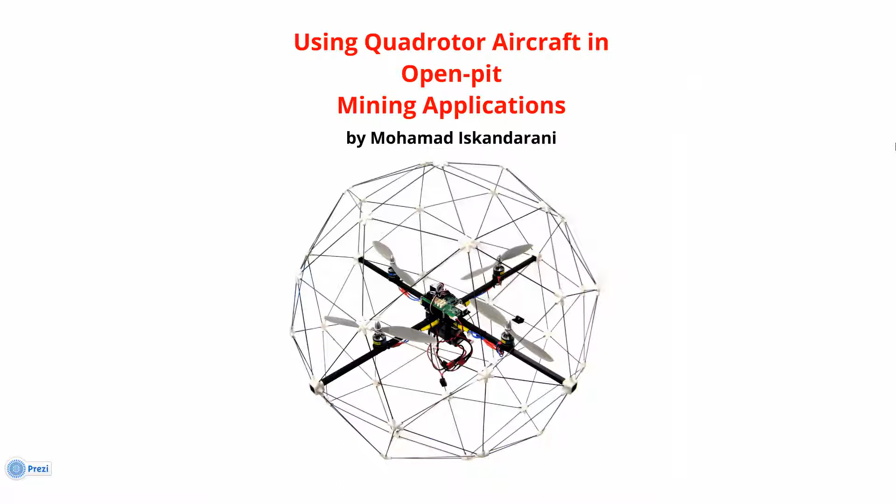We'll look first at the outline for today's presentation. We'll discuss UAV background, using unmanned aerial vehicles, and the motivation for how this fits within the mining sector. We'll look at a problem formulation discussing the different tests and solutions included in the experiment. I find it important to include the experimental setup so viewers can appreciate how the results were found. At the end, we'll discuss the details of the results and conclude with final remarks. I'll also give you a heads up about some extra videos I've made for this project.

So let's start discussing unmanned aerial vehicles themselves. What are UAVs? The definition we use is an aircraft without a human pilot on board. It's either controlled autonomously or by a human pilot on the ground.

Now, the key word I want to highlight here is autonomous. Throughout the experiments in this project and the presentation, the UAV will be accomplishing the task by itself. The user will only give a go signal for safety, and everything else will be accomplished in a decision-making process by the UAV. For those of you with a piloting career, understand that the use of complex control systems and autonomous flight with UAVs is actually replacing that career.

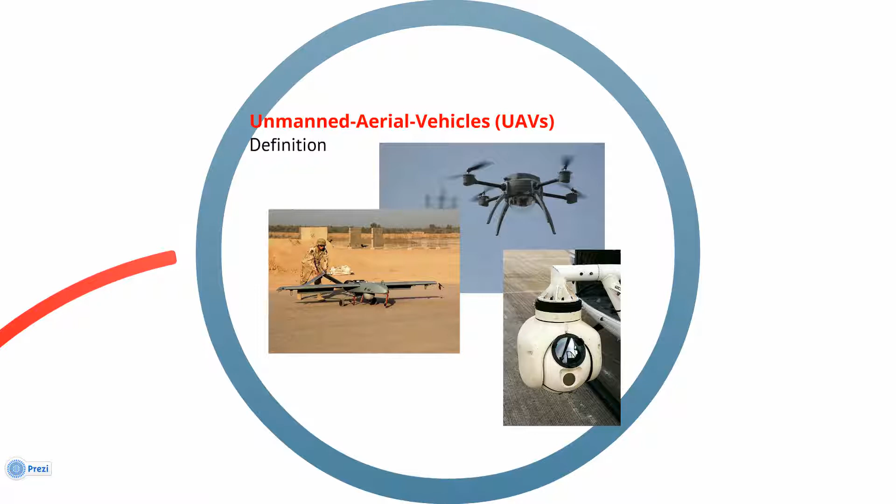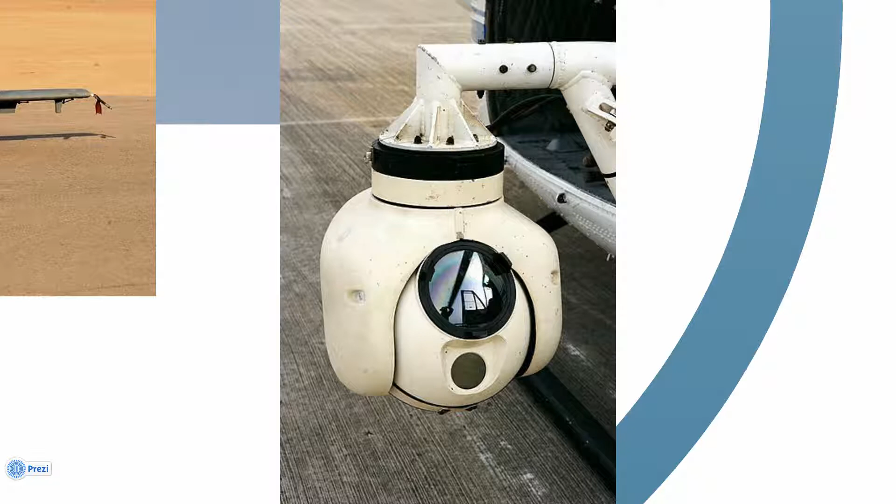There's also a number of sensors included on the vehicle. We see here a camera, but there could be other mapping equipment also available on board. I included this picture to show the complexity of these systems and how they all fit together.

This is mainly used for mapping rooms. For example, in military applications, you can send one of these inside a building to map it or even engage the enemy. And it's always easier to explain how you lost a UAV than to explain how you lost a human being. So this is another advantage of using these things.

Now, for the purpose of this presentation and this experiment, what we'll be using is an actual rotorcraft called the Q-Ball X4, the details of which we'll discuss further on in this presentation.

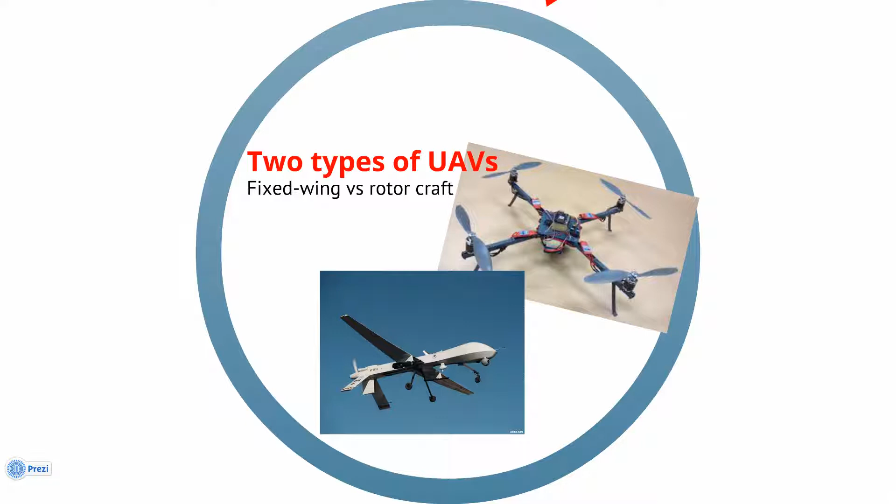Before this, we'll just look at some general applications - why UAVs, and how they're used in daily life. If we look first at search and rescue, we can send one of these UAVs to either follow actual GPS coordinates that are pre-programmed, or even use its infrared camera to locate lost individuals. We can also look at crime scene investigation. In this case, there's no tampering of the actual crime scene, so no investigators need to be there.

This is mainly used for big crime scenes, because they'll just hover, take important pictures, and then there is no tampering of the actual crime scene.

Now, if we look at the next application, which is surveillance, we have military or civilian applications. In military, it's quite obvious: you send it around the enemy line, then you can observe what's happening. While for civilian, it could be used for traffic, so observing the 401 as an example.

We also have hazardous area exploration. Here, we want to prevent humans from being harmed, so examples of this could be fallout areas or even floods. So we send the UAV in order to inspect and maybe even bring this information back to the engineers in order to organize maybe a cleanup strategy of some sort.

So these again are the applications that we used. Now, we want to be able to take the flexibility, autonomous operation, and efficiency of these vehicles I've highlighted in the picture here. We want to be able to take all these capabilities and bring them to a different field than the ones highlighted with CSI, surveillance, and hazardous area exploration.

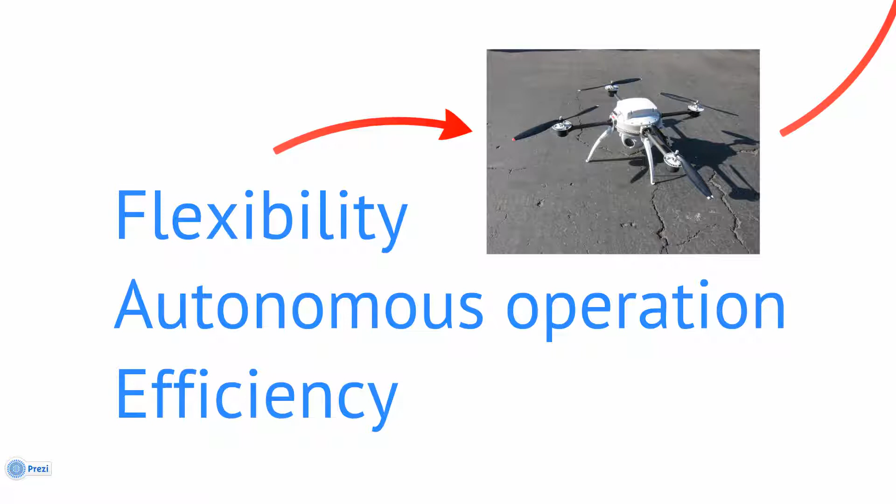In other words, we want to bring this to the autonomous mine. Since UAVs are mainly used in a decentralized autonomous way, the UAV is taking its own decisions based on certain parameters. I want to bring that to autonomous robotics used in an open pit mine.

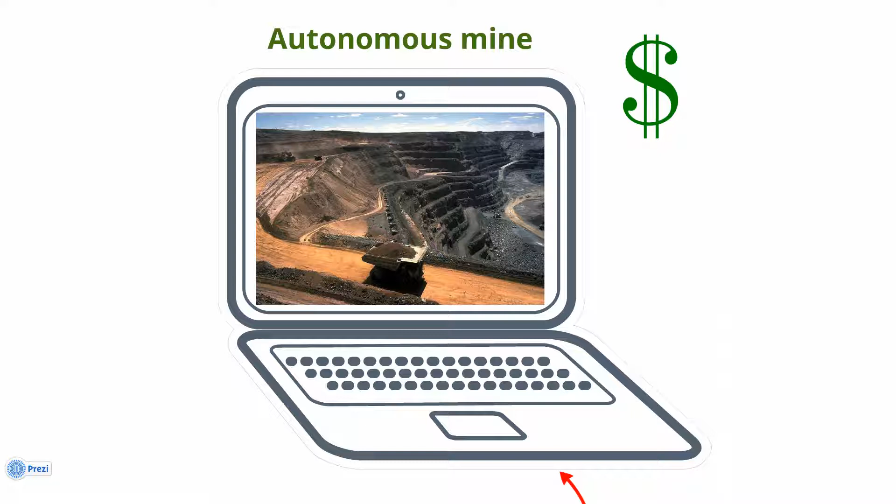And as the objective of every corporation in this field, we want increased efficiency. We want to make more money, in other words. And the UAV is going to be able to bring that capability to this field.

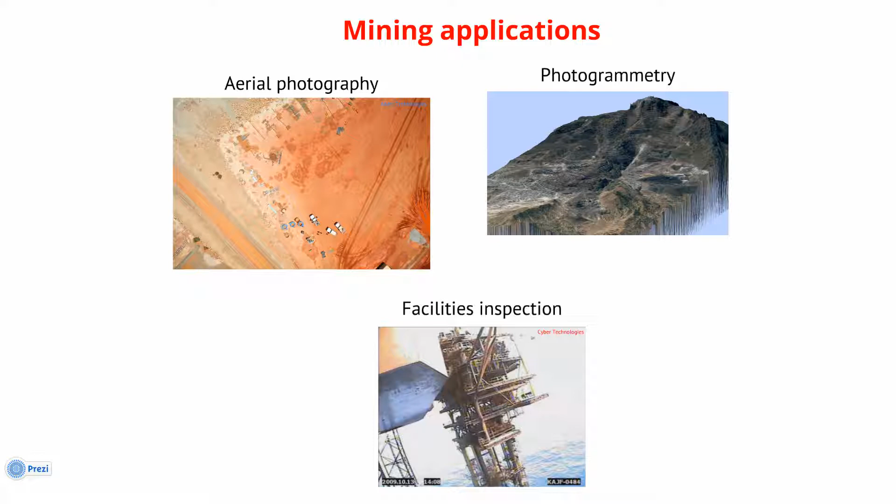So some mining applications that can be brought by the UAV to the field are, first of all, aerial photography. This picture is taken by Adam Technologies - they took a test picture of their work area. You can see in this picture the 3 trucks, some other equipment that's there. It's actually quite high resolution for something flying at a pretty high altitude.

If you look at photogrammetry, it is the practice of determining geometric properties from photographs. So we take a number of photographs of the area and we're able to recreate a 3D map or a visualization as seen in this picture here.

Now, this is very important if your corporation in the mining sector is looking for heightened command and control, because you send the UAVs, they take pictures at specific coordinates and specific frequency, and we're able to recreate this map. This way, you can have a 3D model and a 3D representation of where all the vehicles, the drills, the LHDs are operating in the area.

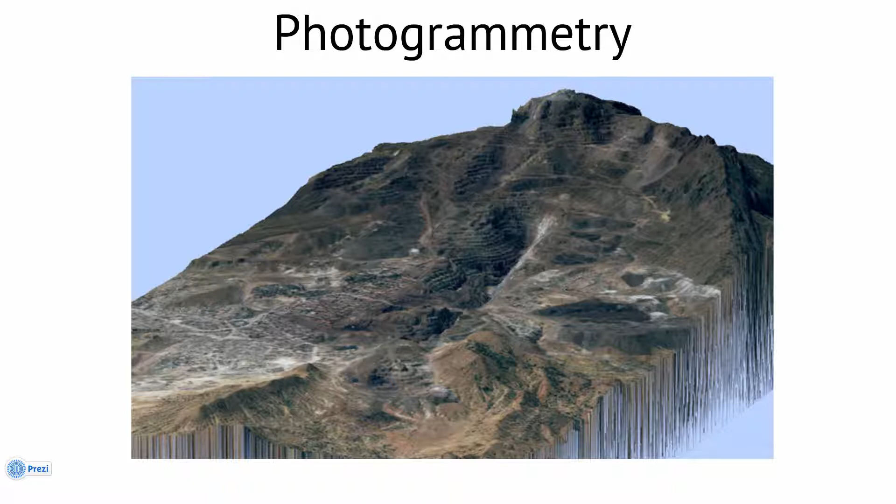And then you're able to have that ready for the engineers in order for them to have a big picture of the mine's operation.

If we look at the third application, which is facilities inspection, this is a picture taken by Cyber Technologies. It's a company that sent UAVs in order to inspect a Montara oil platform that's been damaged by fire. What the UAVs did was take live video feed of the area, and this prevented the engineers from going on board the damaged oil platform and getting injured.

So all this live video feed was relayed immediately to the engineers, and they made their plan for cleaning or evacuation, etc. This is an important application that's quite novel in the mining sector, because you send the UAVs and you avoid injury of actual humans when it comes to either inspecting actual facilities or just for maintenance purposes.

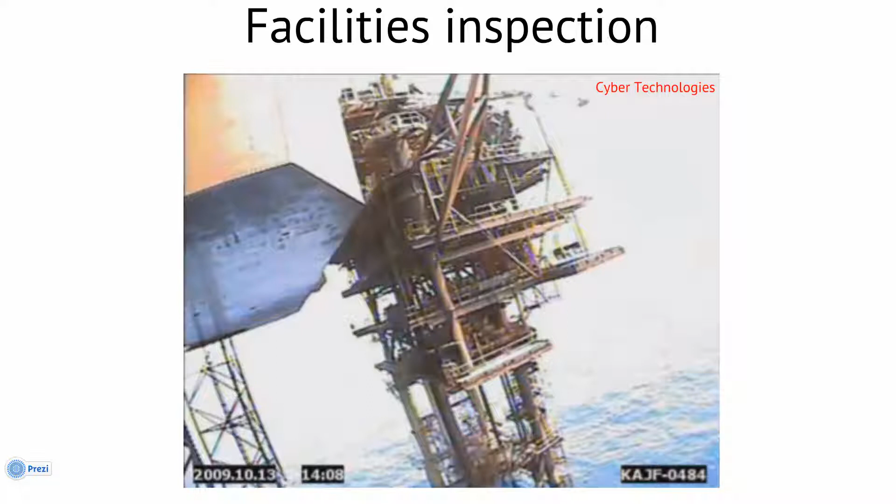So having highlighted all these applications, the objective for the project itself is to be able to recreate these in a lab environment as a proof of concept. This has been done already, but I want to recreate it and introduce viewers not accustomed to UAVs to all their applications and how this could be brought to the mining sector for increased efficiency, more money for companies, and heightened command and control.

is the locate stationary targets test. Here, what we've done is we have in the area three stationary targets, and the objective is for the vehicle, in this case the UAV, to locate these targets, go to that location, and then move on to other targets. At the end, return to its initial position for further instructions.

For the second test, locate and follow moving target, what we've done here is we have a vehicle moving around the test area. The objective is for the UAV to locate that vehicle and follow it around. Now, how does this reflect in actual mining applications?

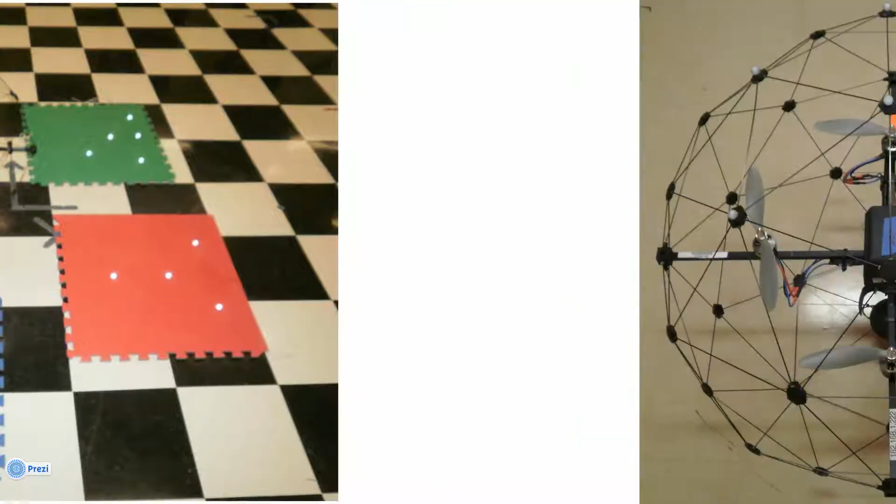Now the mats with the trackables on them represent the targets used for this presentation. If you look at the actual UAV itself, I'll give a quick description of it. You can see the trackable there with the reflective balls.

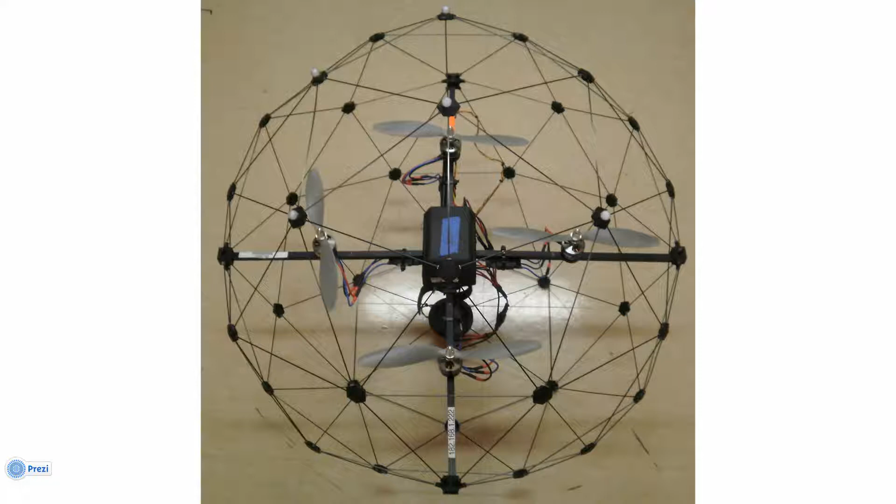You also have this protective layer made of carbon fiber sticks. This is mainly for safety of the operators and the vehicle itself, so it protects the motors and the CPU assembly you see in the middle.

The actual low-level control—what I mean by low level is maintaining the pitch angle, yaw angle, and actual Cartesian coordinates—is done on the vehicle itself by a number of nonlinear proportional integral derivative controllers. In other words, PID controllers for minimizing the error. That's how the control is being done.

What I've designed for this experiment, which we'll discuss in the next slide, builds upon that. It's the higher-level control I've constructed over the low-level PID control.

For the path planning algorithms themselves, for each one we have a different algorithm. They're quite simple, and I won't spend too much time on this. I'll just give a quick description of how the task has been accomplished autonomously by the vehicle. If we look at the first...